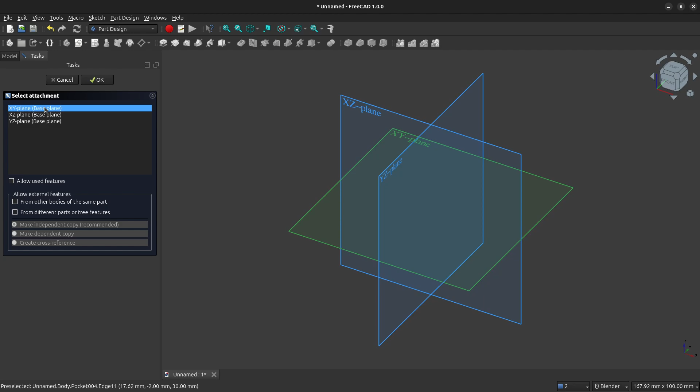Once we're into the Sketcher workbench, we'll begin by creating a rectangle that is symmetric around the origin. We'll do this by clicking in the top left-hand corner, clicking on the vertex in the bottom right corner, and clicking on the origin, then using the Constrain Symmetric tool.

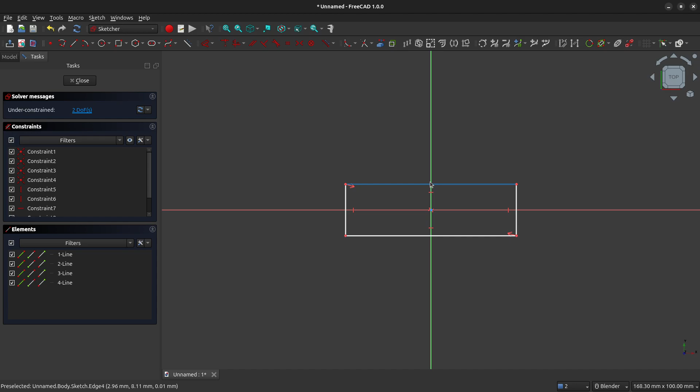We are going to set the width of this box to 48 millimeters, and we're going to set the height of this box to 10 millimeters. Our sketch is fully constrained, so we can close out of the Sketcher workbench.

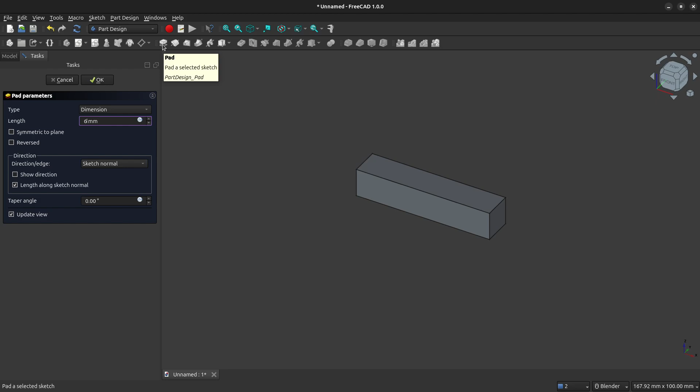We're going to pad this shape out 6 millimeters, and add a new feature to the top of this block. Left click on the top of the block, click on Create Sketch, and create another rectangle along the bottom of this block. We're going to reference using the Create External Geometry tool the bottom of our block.

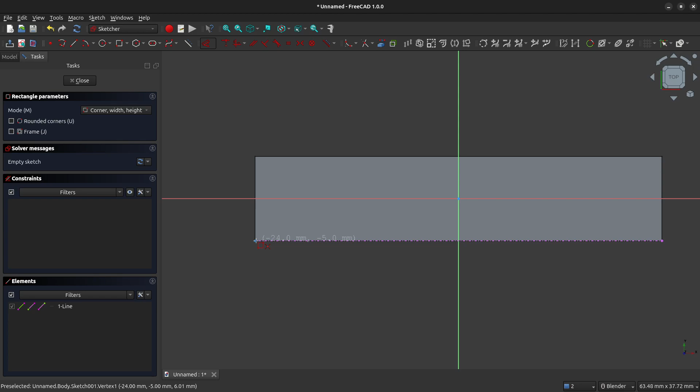Grab the Create Rectangle tool and begin by hovering over the bottom left-hand corner, left-clicking, and dragging your rectangle out. We're going to stop short of the edge of the box there, and constrain the corner of our new box to the corner of our block by left-clicking on both vertices and using the Constrain Coincident tool. Lastly, we're going to set the height of this box to 3 millimeters.

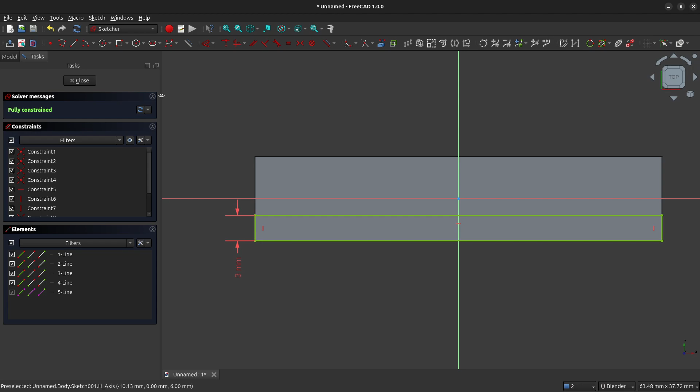Now that we've got that done, our box is fully constrained and we can close out of the Sketcher workbench. We're going to pad this new rectangle out to 24 millimeters, and this will create the basic bracket for our sensor.

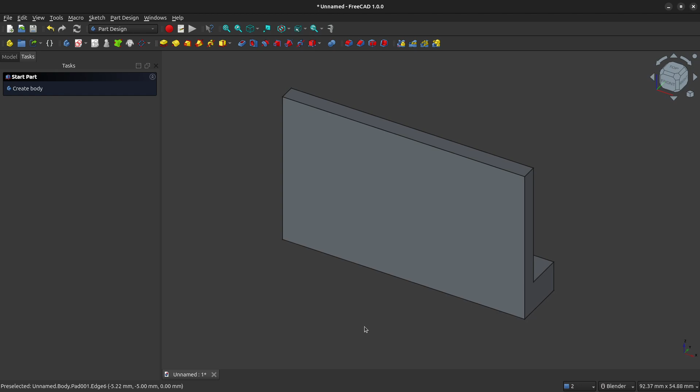We need to add some features to it now so that it will connect onto the rest of the parts on our SparkBot robot. We're going to go to the bottom of this bracket and left click on the bottom face and create a new sketch.

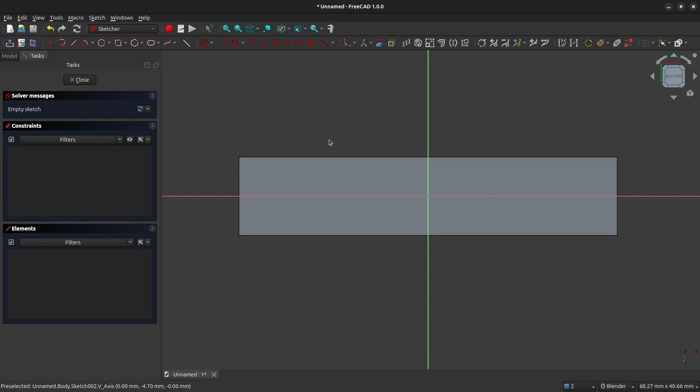Here we're going to create a carve out in the bottom of the bracket so that this bracket can sit on top of the bracket for our 9-volt battery. We're going to reference the top and bottom edges of our bracket here using the Create External Geometry tool.

I'm going to grab the Create Rectangle tool, and just create a box in the center here. I'm going to left click on the top left corner, left click on our top edge, and use the Constrain Coincident tool.

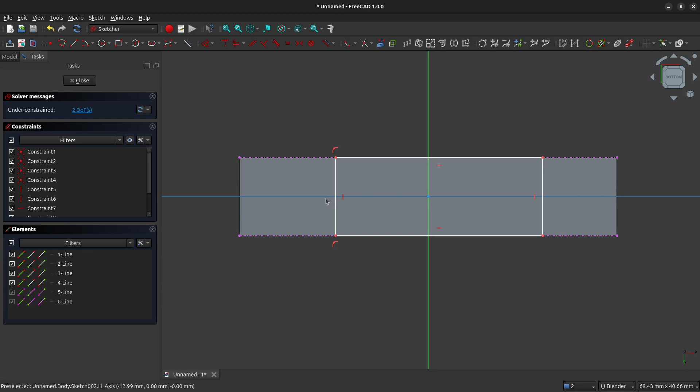I'm going to do something similar for the bottom edge, and now our rectangle is constrained to the edges of our box. We're going to make this box symmetric around the y-axis, and now we're going to set the length of this box to 24 millimeters.

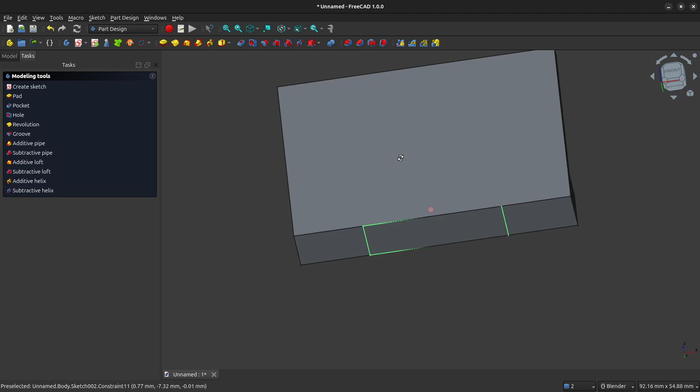The sketch is fully constrained, so we can close it at the Sketcher workbench. We're going to pocket this shape here to a depth of 6 millimeters. This creates a carve out so that the 9-volt battery box will be able to sit up nice and close to the backside of our sensor.

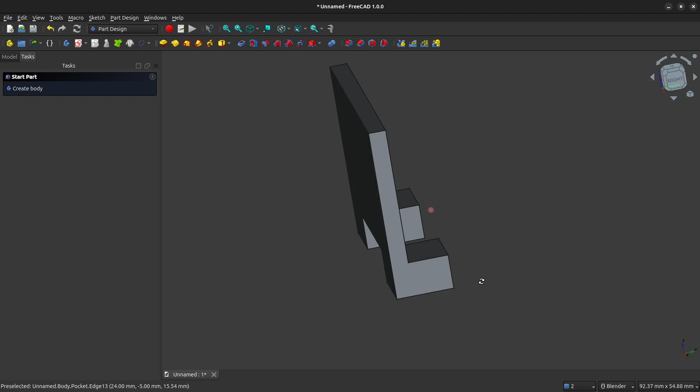Next, we need to increase the thickness of these bottom pads at the bottom of our bracket. The screws that we're going to be using are longer than the 6 millimeters that we've provided here.

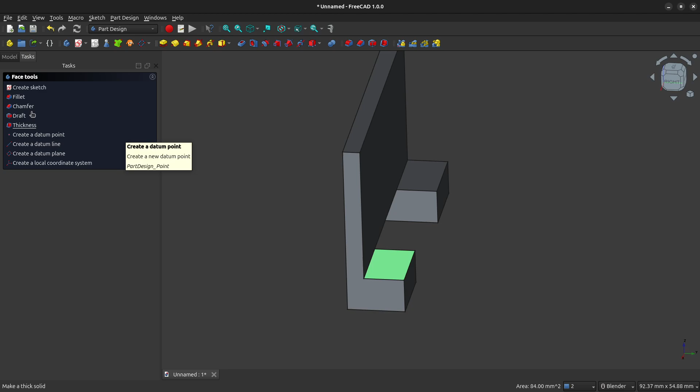So to increase the thickness of these pads, I'm going to left click on the top face of one of these pads and create sketch. I'm going to come up here to the View Section tool and click on that so that I'm clearing away the top part of the bracket and I can just focus on these bottom pads here. I'm going to use the Create External Geometry tool, and reference the right and left edges of our pads.

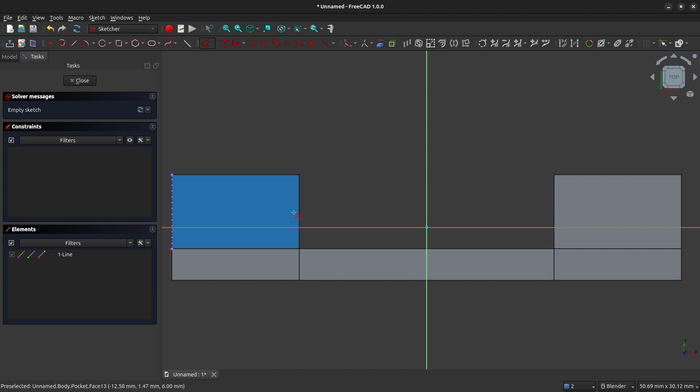Right click to clear my tool. Now I'm going to use the Create Rectangle tool.

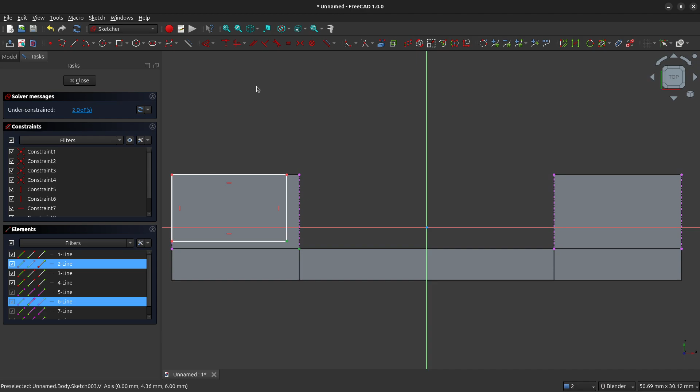I'm going to create a rectangle that is constrained to the edges of our box here. So left click on the top left corner of the rectangle, left click on the top of the line segment, and we will constrain coincident there. We will do a similar thing to the bottom right corner of that rectangle.

So we can see that this rectangle now is fully constrained to the bottom left pad. And we'll do a similar thing over here.

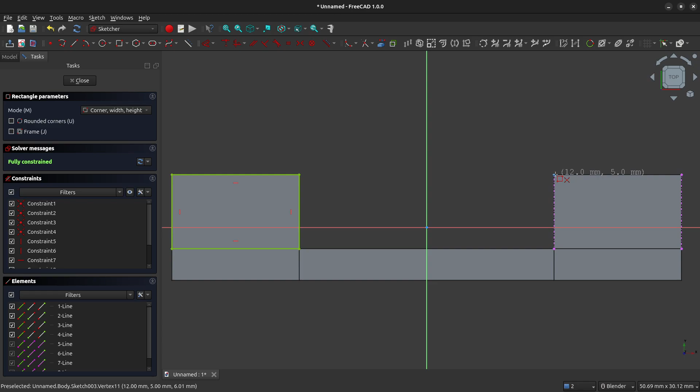If you create your rectangle by left clicking on the top vertex of this referenced line, the rectangle will automatically lock to the top of that line, and we can left click on the bottom of the right hand line. That's the quick, easy way of constraining the new rectangle to the pad.

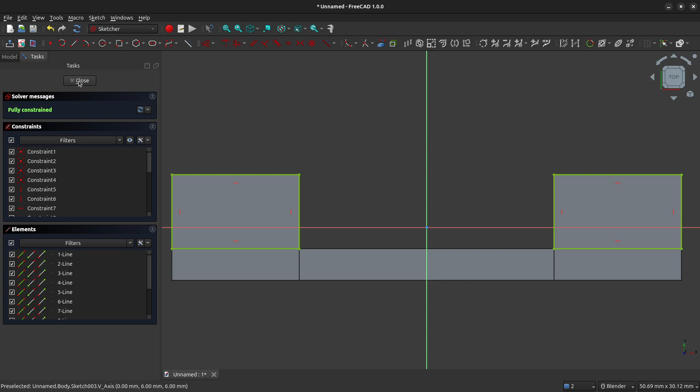At this point we're done, and the sketch is fully constrained, so we can close out of the Sketcher workbench. Now we're going to pad out the rectangles we've just created, by 3.5 millimeters. So now we have suitably thick pads at the bottom that we'll be able to put a screw into through the bottom of our SparkBot platform.

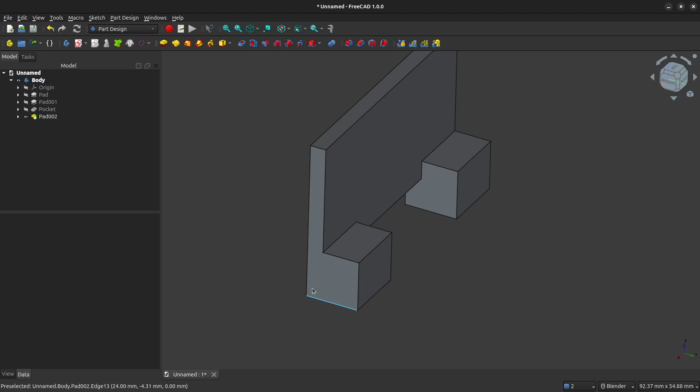Our next step is to rotate around to the front face of the bracket, and we're going to add some features to the front that will allow the sensor to be mounted into the bracket. So right click on the front face of the bracket and click on Create Sketch.

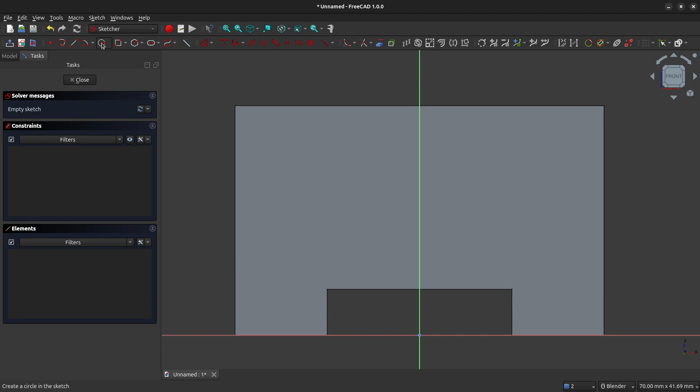We're going to begin by creating two circles. So we'll grab the Create Circle tool, and we'll just draw out two fairly random circles.

We're going to constrain them to the same horizontal plane. So left click in the center of both circles and click on the Constrain Horizontal tool. Now when I move one circle, the other circle moves with it.

I'm going to constrain the diameters of both circles so that they're the same. So left click on both circles and then click the Constrain Equals tool.

We're going to make it so these two circles are symmetric around the y-axis. So left click in the center of both circles, left click on the z-axis, and we'll click on Constrain Symmetric. Now when I move one circle in, the other one moves towards it.

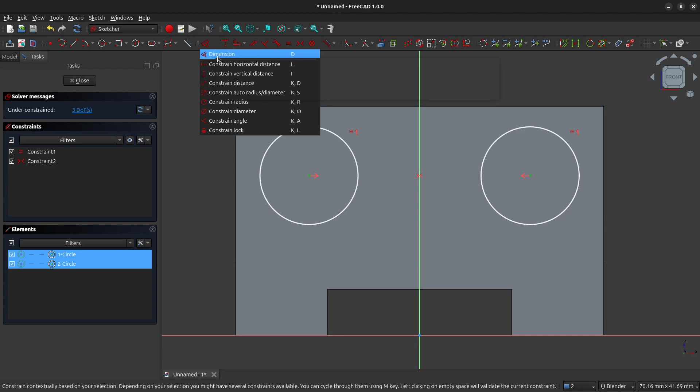We're going to separate these circles by 26 millimeters. So again, click in the center of both of these circles and click on the Constrain Horizontal Distance, setting that to 26 millimeters.

Next, we're going to constrain the diameter of both of our circles. So just pick a circle and choose Constrain Diameter, and we're going to set this to 16.4 millimeters. So now we have constrained the diameter there.

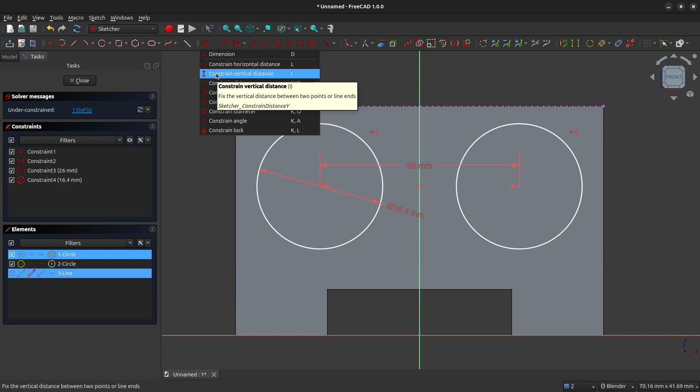The last thing we need to do is constrain the position of these circles on our bracket, with reference to the top of the bracket here. So I'm going to use the Create External Geometry reference tool, bring in that top line, left click on the center of the left-hand circle, left click on the end of our line segment there, and set the vertical distance to 10.5 millimeters.

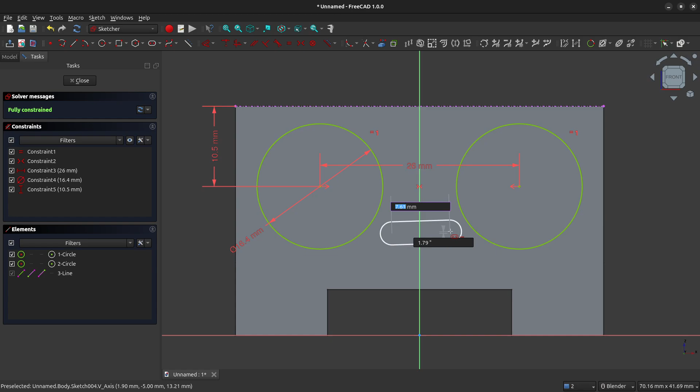So now these two main circles are fully constrained. I'm going to now add a slot down below it. We'll use the slot tool, and we'll just create this slot so that it is symmetric around the y-axis, or the z-axis.

We're going to make it symmetric. Left click on both of these dots, left click on the z-axis, and click on the Constrain Symmetric tool. So now our slot is constrained in that dimension.

Let's constrain the radius of the slot. Left click on one of the arcs, left or right, doesn't matter, and choose Constrain Radius. We're going to constrain the radius to 2 millimeters.

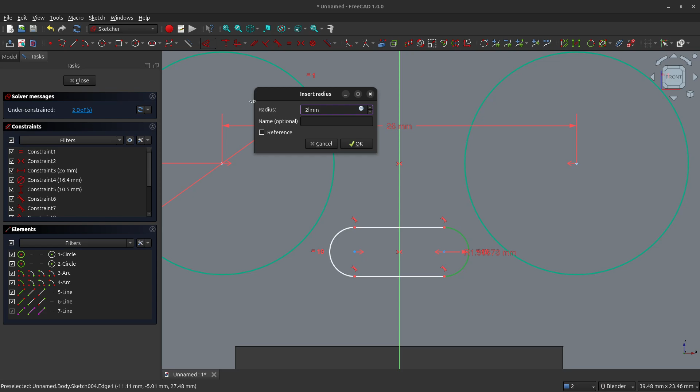Now that we've got that done, we need to constrain the width of the slot. So left click on those two dots, and we're going to constrain its horizontal distance to 6.4 millimeters.

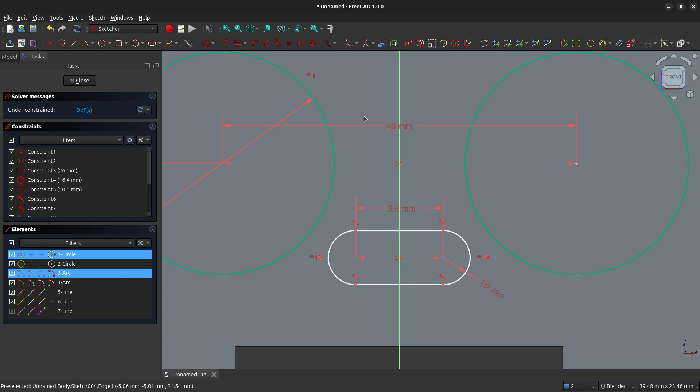Lastly, we just need to constrain its position along the z-axis. So left click on that left circle, left click in the center of this larger circle, and we're going to constrain the vertical distance between these two points to 7 millimeters.

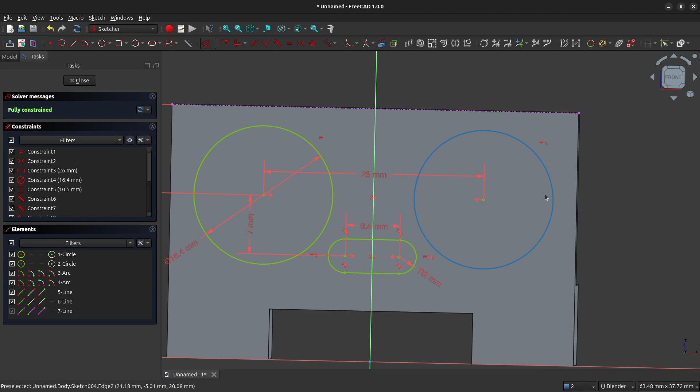So now we've got the two main features created that will allow the sensor to simply sit in a passive way in our bracket. So let's close out because we're fully constrained, and let's pocket these features. 5 millimeters clears the pockets.

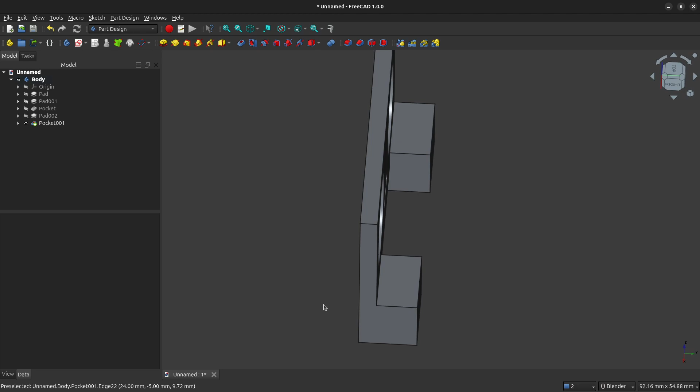The next thing we're going to do is add the holes through our bottom pads that the screws will use to attach to the base plate of the SparkBot. So I'm going to rotate this bracket around so I can see the bottoms of these pads, left click on one of the pads, and click Create Sketch.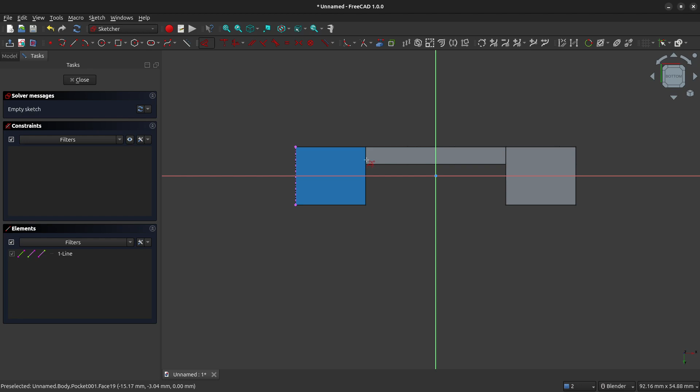I'm just going to center a circle in the middle of both of these pads. I'll use the Create External Geometry Reference tool to bring in the edges of these pads, and then use the Create Circle tool to create a circle here.

I'm going to use the constraint symmetric, and get rid of this constraint around the x-axis so I can move this circle. Now I'll left click the top left corner, the bottom right corner, the center of the circle, and choose constrain symmetric. We'll do the same on the other side, clicking the center of the circle last, and constrain symmetric. We're going to set both circles to have the same diameter, so left click on both and constrain equal.

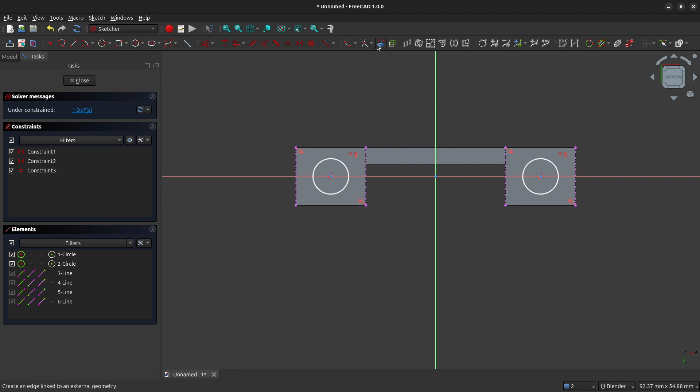Now we're going to set the diameter of these circles to 2.8 millimeters. We're going to be using 3 millimeter plastic screws, designed for holding onto plastic, and so 2.8 gives enough clearance for the threads on these screws.

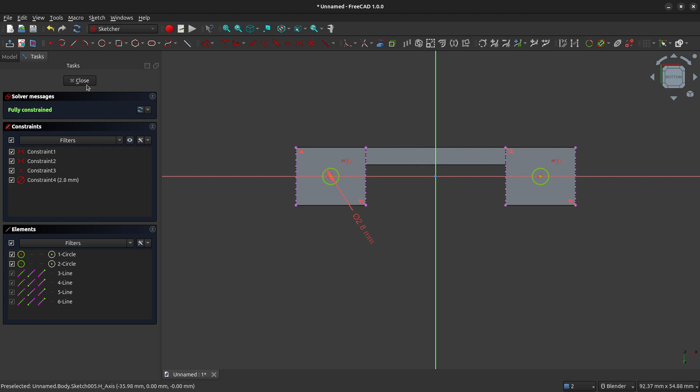We're fully constrained here, so we can close out of the Sketcher workbench. Now we're going to pocket this feature, and we need to clear at least 9.5 millimeters, so we'll put in 10 millimeters. The pocket holes have gone all the way through.

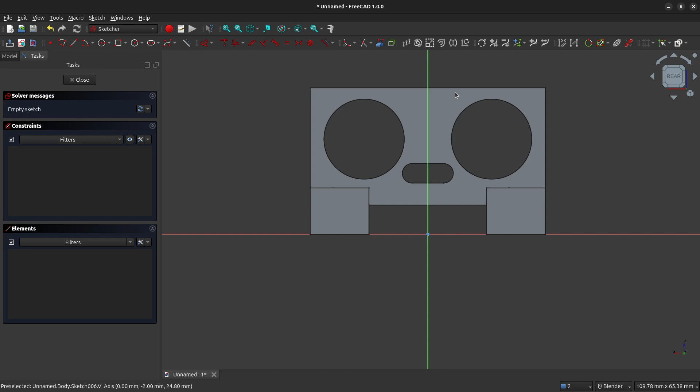The next feature we're going to add is some space around the inside of the bracket here, where the circuit board for the sensor pokes through partly. So we're going to click on that top face and create a sketch, referencing the top edge of our bracket.

So grab the Create Rectangle tool, click right on the edge we've referenced, drag it in and across, making sure it's symmetric around the z-axis. So left click the top left corner, the top right corner, the z-axis, and constrain symmetric. Now the rectangle is centered around the z-axis.

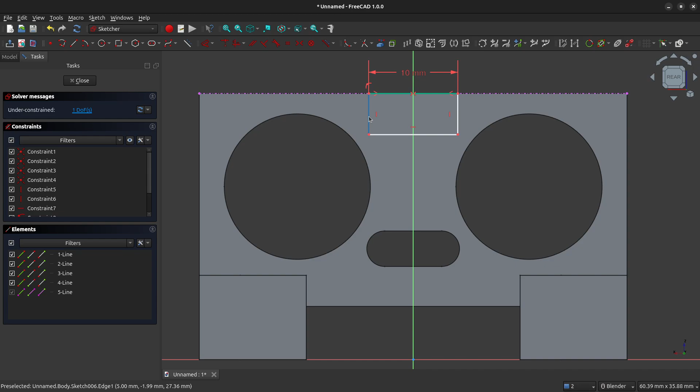We're going to set the length of this rectangle to 10 millimeters, and the height to 3 millimeters. Our sketch is fully constrained, so we can close out of the Sketcher workbench, and now pocket this feature to a depth of 1.7 millimeters. That creates a nice little pocket there.

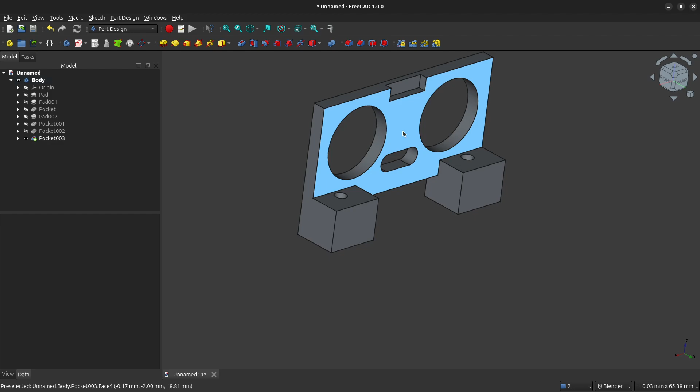The last thing we need to do is create a small pocket around the pocket we created earlier. So once again, left click on that front face, click Create Sketch, and I'll zoom into that pocket. I'm going to use the external reference tool and pull in the edges of our pocket, then right-click to clear my tool.

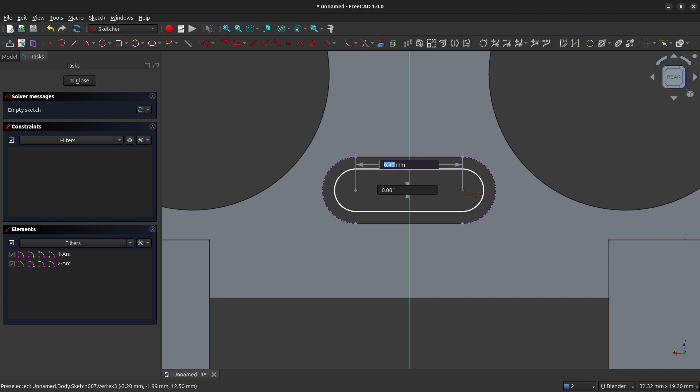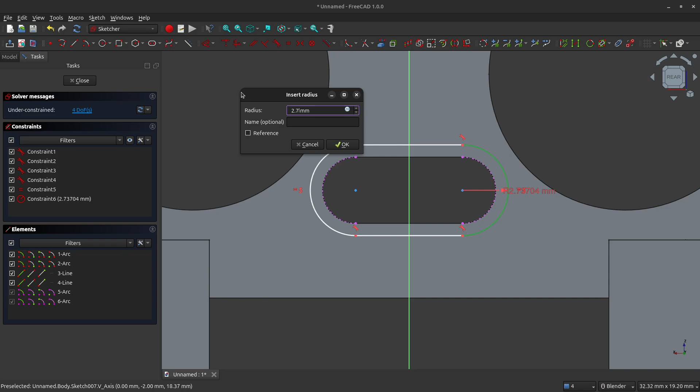Now I'm going to grab the slot and create a new slot, being careful to click on those center points on our referenced arcs. This slot is constrained to those points, but now I'm going to set the radius of the slot by constraining radius to 2.7 millimeters. Now it shows here that I have 4 degrees of freedom, so when I zoom in, I can see the slot didn't actually get constrained to the centers of those arcs.

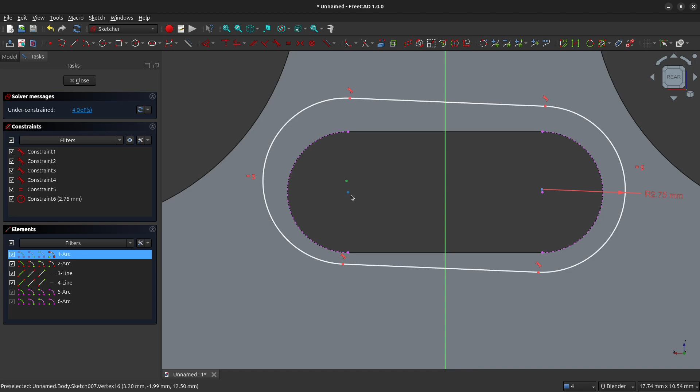So to fix this, I'll left-click on the center of our current slot, then left-click on the center of that arc, and constrain coincident. We'll do the same thing on this side: left-click the center of the arc, constrain coincident, and now our slot is fully constrained, with a radius of 2.75 millimeters, so I can close out of that.

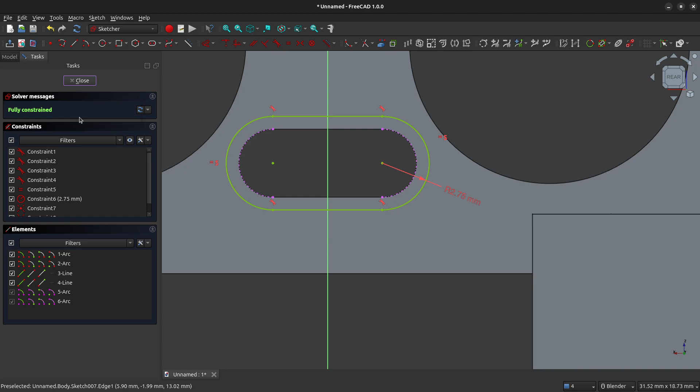And I'm going to pocket this new slot to 0.6 millimeters. So there we are, that creates a little bit of an inset around that slot.

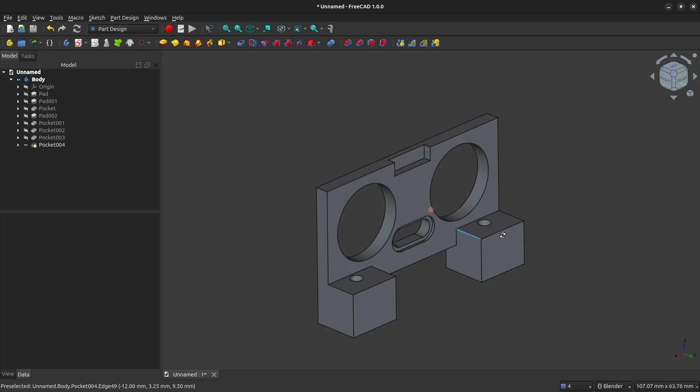All right, so we now have a useful bracket for the HC-SR04 ultrasonic sensor, and this will allow us to put the bracket around the 9-volt battery holder that we've created for SparkBot.